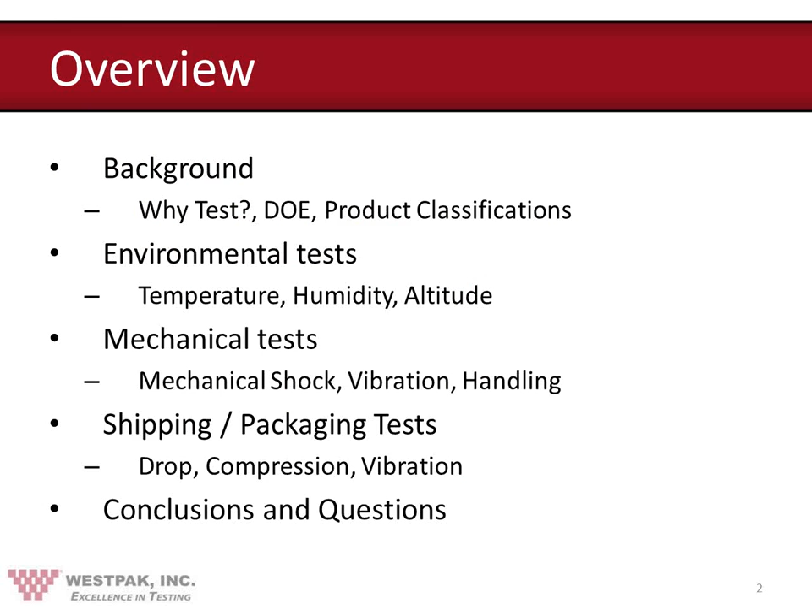So, why test? All products will be subjected to hazards throughout their lives—shipment, storage extremes, different operating environments, rough handling and installation. Many products are also subject to regulatory and certification requirements, often including safety, EMI and EMC compliance, especially for electronic products, and product functionality—basically the product does what it is intended to do and is compliant with any industry standards. Lastly, it's a good idea to test to ensure high levels of customer satisfaction and low warranty claims.

I'd like to add that a question we often hear is, why should we test this product to begin with? It's rugged as a tank. The real answer is the product will in fact be tested—that's not the question. The distribution environment, and sometimes the in-use environment, will see to that. The real question is, who sees the results first, you or your client? For the sake of a quality delivered product, we highly recommend testing the product first so you can determine if changes are necessary prior to the customer getting upset with it.

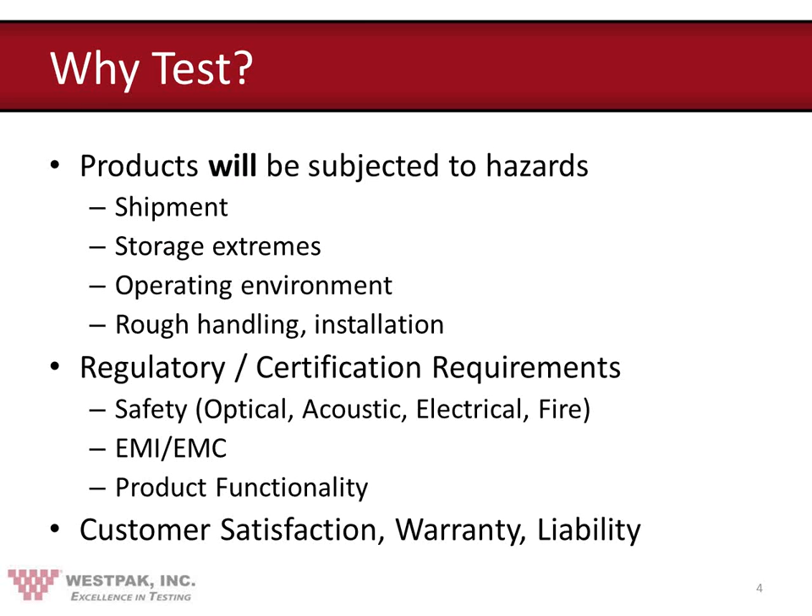Design of experiments, or establishing the test plan: characterize all the environments or hazards the device under test will see throughout its life. For this webinar, we'll split them into 3 sections—environmental hazards, mechanical hazards, and shipment or packaging hazards. Consider if there are any unique or combined environments that your product may see in its life.

Next, determine the acceptance criteria or inspection criteria for your product. It may be acceptable to have some minor cosmetic damage, but it is not acceptable for the product to fail to operate. It's always a good idea to start small—do basic mechanical or temperature testing early in the process to screen out any major issues with the product. Lastly, consider testing to level versus testing to failure. Testing to level are the minimum hazard tests the product must survive to be brought to market. Testing to failure, or HALT testing, is extreme testing in which the product is forced into a failure mode, and based upon that, product improvements can be made.

I'd like to add that another option we often see is margin testing, which does test the product to failure. The reason is a good one from a theoretical standpoint: it tells you how much headspace you have in your design. If you know a given design has to withstand a certain amount of vibration, impact, or other environmental input, you know what your spec level should be. If you're able to double that with the product, you know it has 100% headspace for that particular input. That's very valuable information for cost reduction, ruggedization, eventual package design, and a lot of other things. So there's a case to be made for margin testing rather than just testing to a certain level.

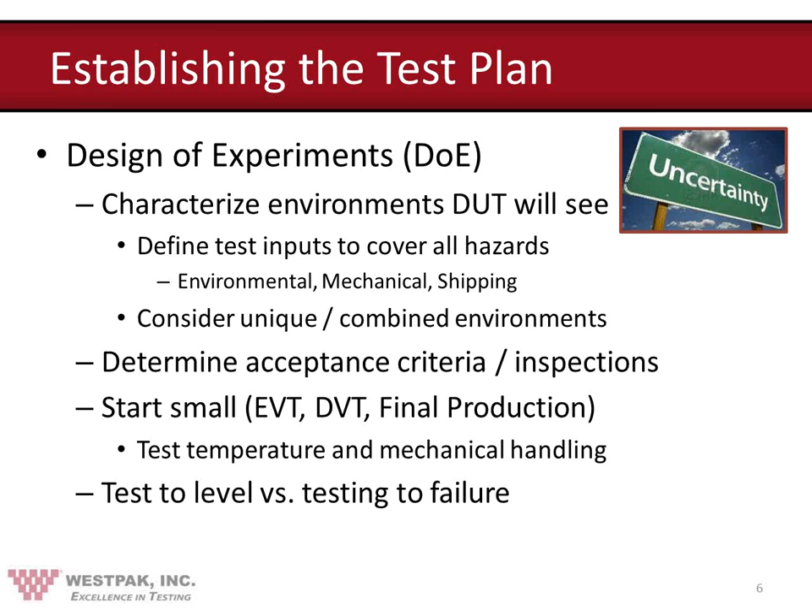Next, not every type of product should be subjected to the same level of test. Today we'll be talking about a 19-inch rack mount network switch, the 24-port basic network switch. For network hardware, they're often split into three categories: small handheld products, often consumer products; a small product that an individual can handle or manipulate themselves; or a large product that takes two or more people to move, using a forklift, etc.

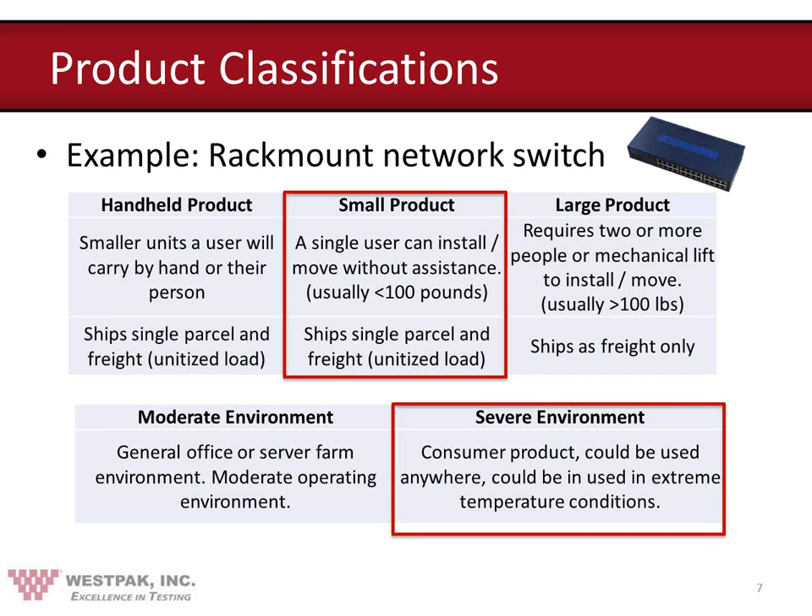The environment can either be moderate or severe. A moderate environment might be a general office or a server farm—you know where it's going to go and what those operating environments look like. A severe environment means it could go anywhere and be used in any conceivable location. Because we don't know where this network switch is going to go, we're going to consider all of our tests today to be severe environment tests.

So, on to testing. First, environmental testing. The first test we have to discuss is non-operational temperature testing, starting with storage testing. Storage temperatures can range between -40°C and +85°C. These are pretty severe temperature changes, but it's not inconceivable that a product will be subjected to that during its life. Shipping conditions are sometimes tested here too—usually a cold condition of -40°C, a tropical condition of 40°C at 90% relative humidity, and a desert condition of usually 60°C with either 15 or 30% relative humidity.

What I've discussed up to this point are static extreme conditions. Often testing is also done in a cyclic manner, going between high and low extreme temperatures at 1 to 2°C per minute, or as a thermal shock test, transitioning temperatures between 10 to 50°C per minute. There's a whole slew of test standards describing this, and the common issues are things you'd expect: different thermal expansion coefficients, oxidation or corrosion from humidity, and exceeding material limits, where you get above the thermal limit for a material and things melt or get soft.

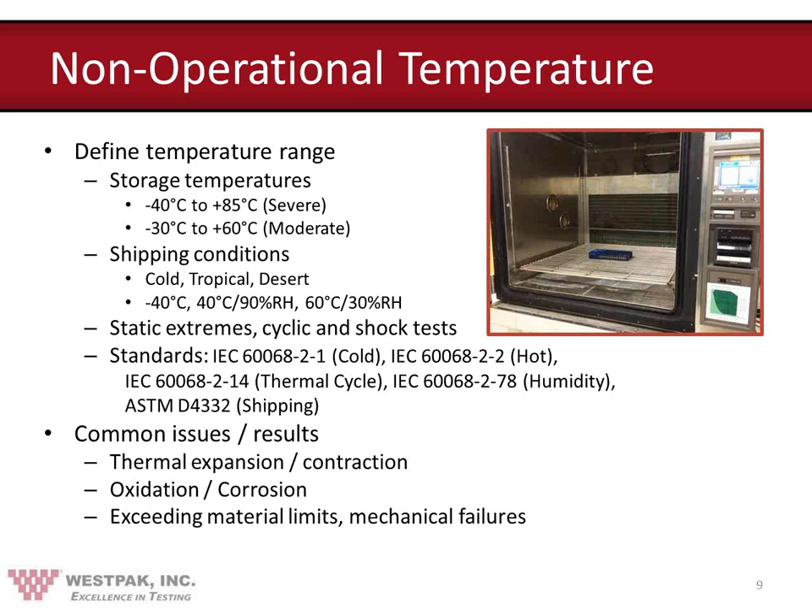For an operational temperature test, you're usually concerned about different components operating above their maximum specification inside the unit. For this test, we've opened up the switch and you can see there's a chip with a heat sink on it. It's been instrumented with thermocouples so we can determine how hot it gets during operation. Sometimes products will have internal temperature sensors that can be used for this instead.

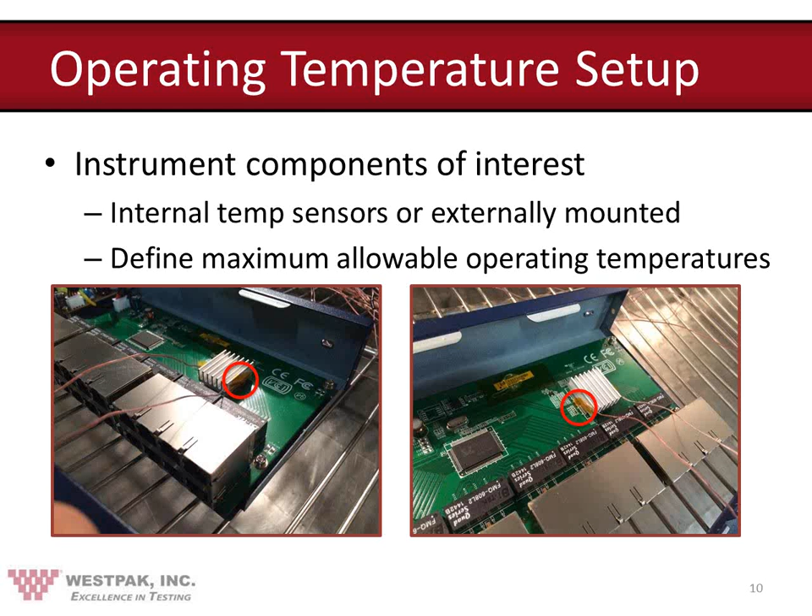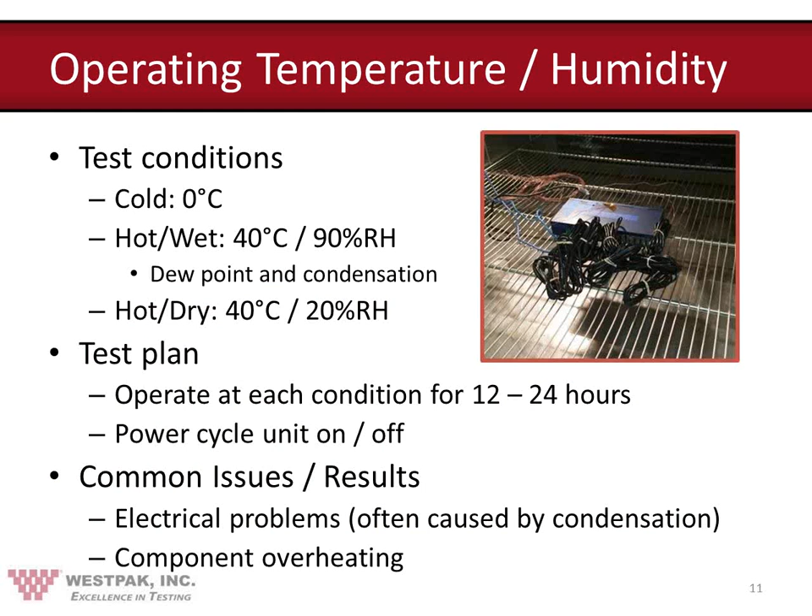A typical operating temperature humidity test will be done at three conditions: a cold condition, a warm and wet condition, and a warm and dry condition. The warm and wet condition can be very severe—if any components inside the unit are cool, they may suffer from condensation buildup. The test plan usually has the unit operating in each condition for somewhere between 12 to 24 hours, and it's also common to power cycle the unit on and off to force condensation issues. Common issues and results, as you'd expect, are electrical problems and components overheating.

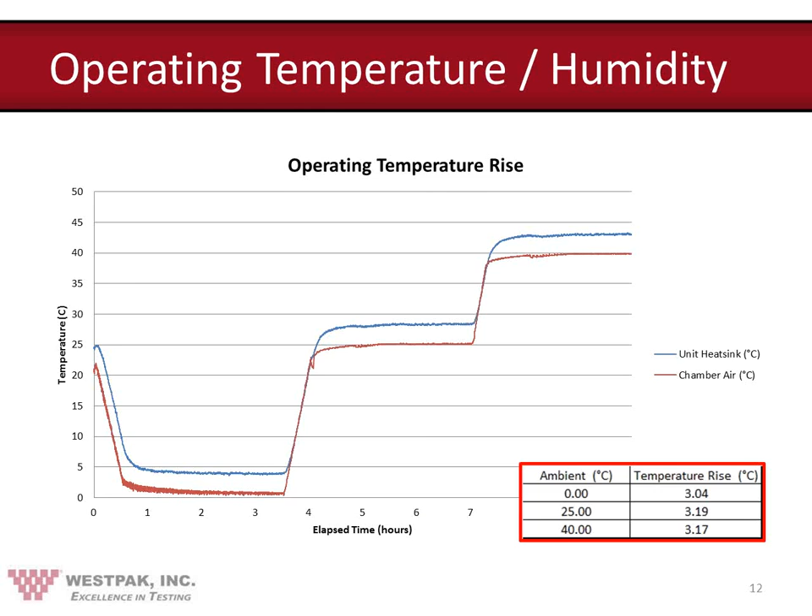I'd like to add that the reason for altitude testing is not necessarily limited to aircraft or shipment, as some might think. All aircraft are pressurized, and the pressurization level generally is controlled, well, it has to be controlled by the pilots. Certainly is controlled by the pilots union, and it's almost always 8,000 feet. An exception is the so-called Dreamliner that Boeing is now flying that is pressurized to a level of 6,000 feet.

But almost always the aircraft are going to be pressurized, and 8,000 feet is about the max you're going to get. On rare occasions, so-called feeder aircraft will get to a little higher level, but pilots are required to have supplemental oxygen and pressurization above 13 to 14,000 feet. So there's not a huge upper level there.

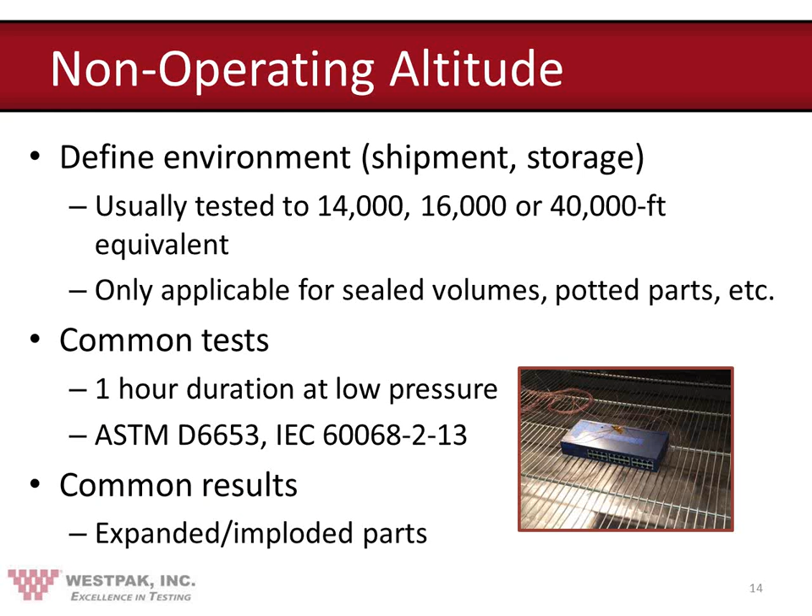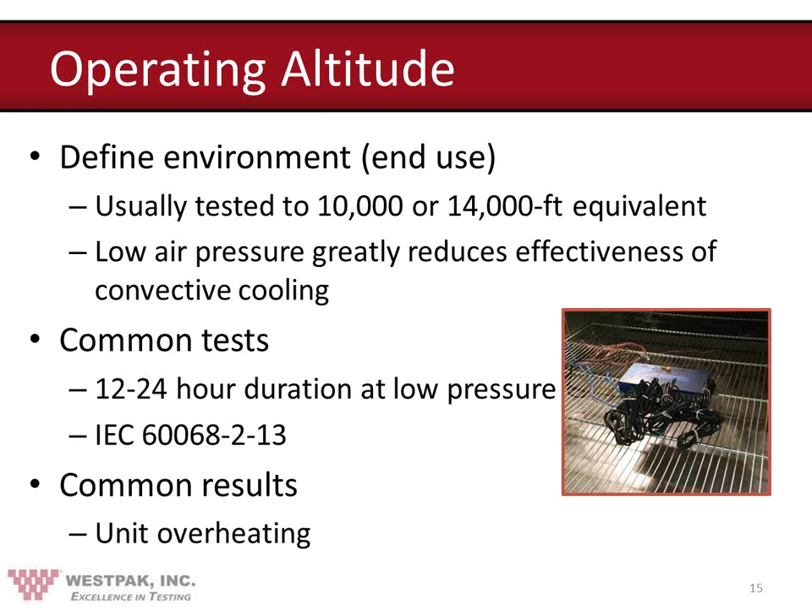Next, we have an operating altitude test. These are usually based upon usage environments. Often this is done at 10,000 feet or occasionally at a 14,000 feet equivalent. The low air pressure greatly reduces the effectiveness of the convective cooling of the product. The common tests are usually longer, between 12 to 24 hours in duration at low pressure. They're usually done at an elevated temperature also of 40 degrees C. The common result we see is the unit overheating during test.

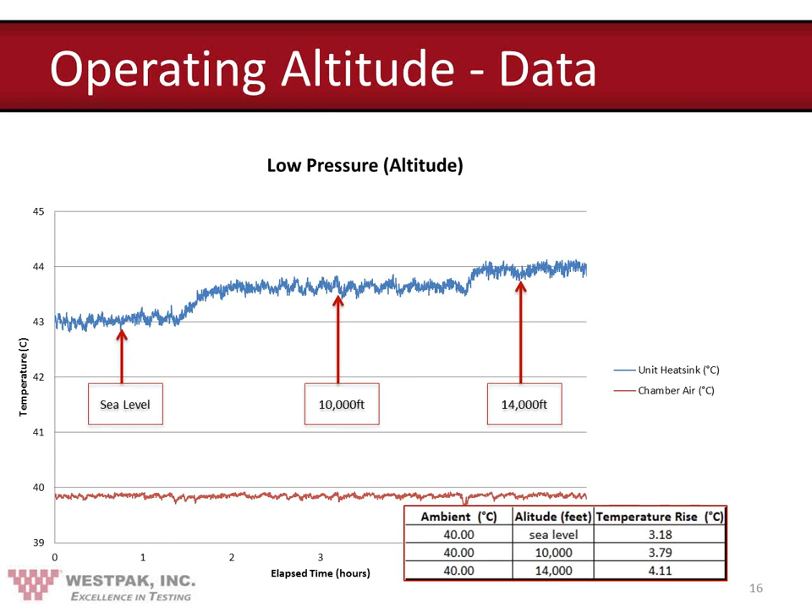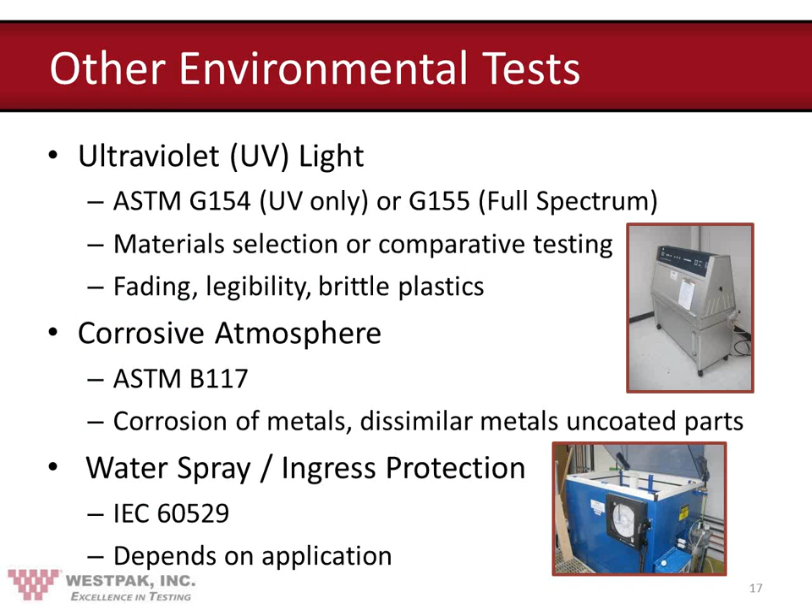Some final thoughts on environmental testing. Think about typical inputs versus worst case scenarios. While the unit is operating, consider high or low voltage inputs. Always think about safety. Do the thermal cutouts protect the product? And if the device does enter some sort of failure mode, is there a hazard, either electrical or mechanical, to a user?

And as I mentioned in the beginning of the presentation, think about your failure criteria. Is cosmetic damage okay? If so, to what level? Does the product need to continue to function in harsh environment, or is it okay for it to shut down? And lastly, again, is it still safe?

I'd like to add that in our experience, damage criteria, or the definition of what constitutes failure, is one of the biggest sore points, if you will, or sticking points in the whole test. So you have to be able to understand what constitutes failure or damage to your product. Some people will actually make classifications out of damage in terms of moderate, normal, or severe, things like that.

Sometimes damage can be considered cosmetic, sometimes it's non-functionality. We often encourage clients to consider damage as any condition in which you would not want your customer to receive the product. However you define it, it's very important that you understand this must be defined prior to actual testing.

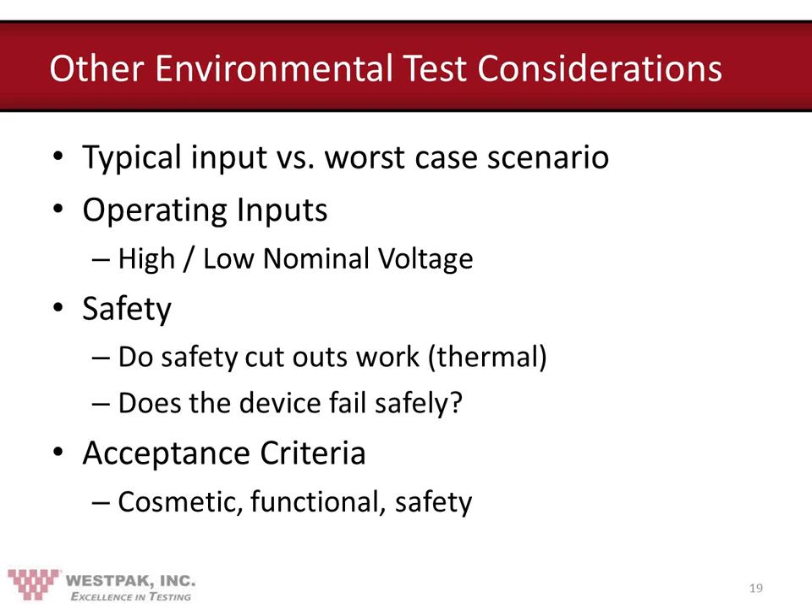That wraps up environmental testing.

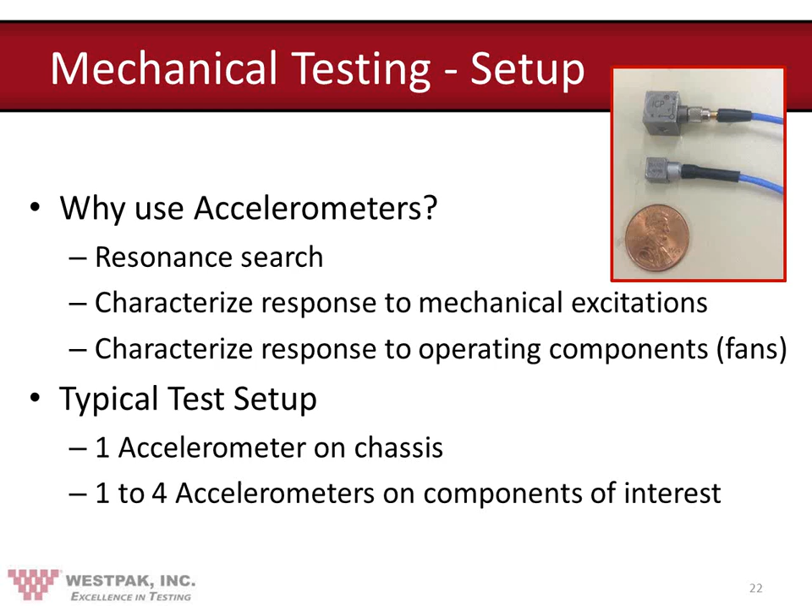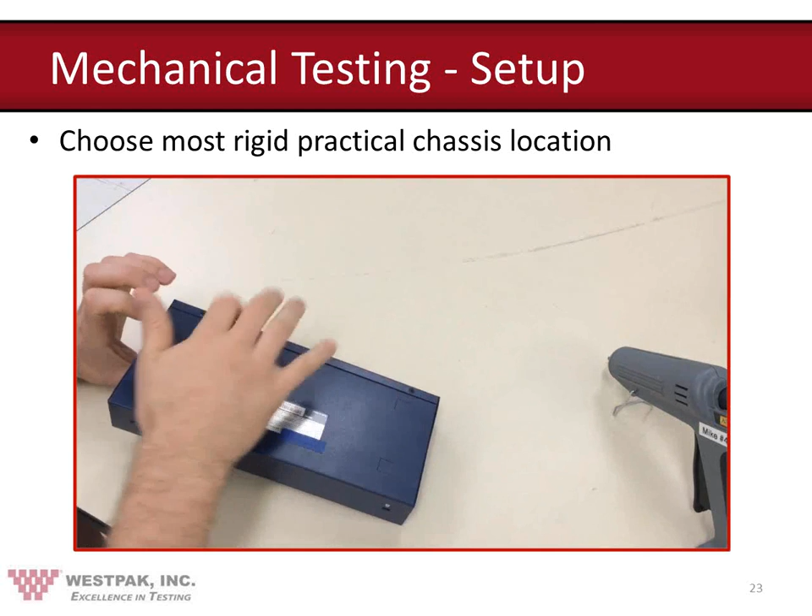So first we need to determine where to mount our chassis accelerometer. One way to do this is to tap the exterior of the unit to hear the highest pitched or most rigid location on it. Usually you can identify it visually as well, looking for places where there are several screws. You can see I've now determined where to put the accelerometer near the AC power inlet.

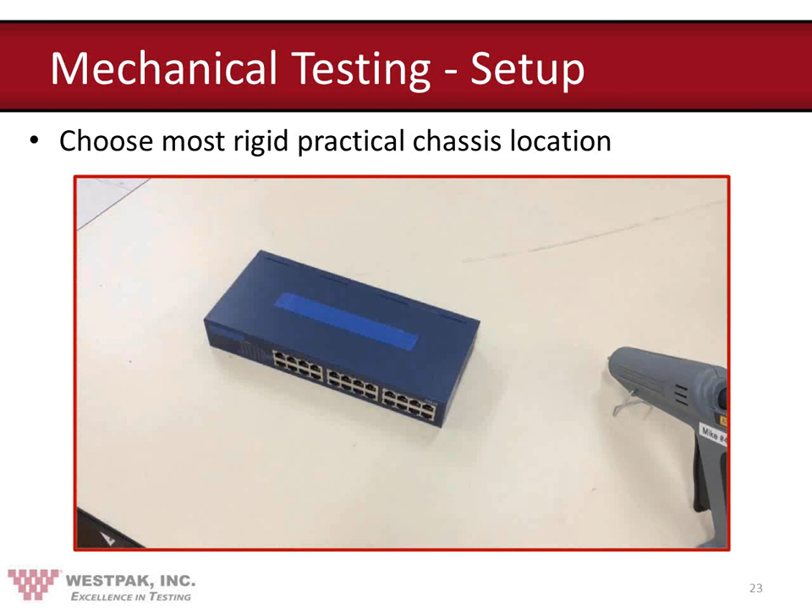Next we'll mount the accelerometer. Squirt a little bit of glue onto the area where the accelerometer is to be adhered, press it on, and wait 15 to 30 seconds for the glue to dry.

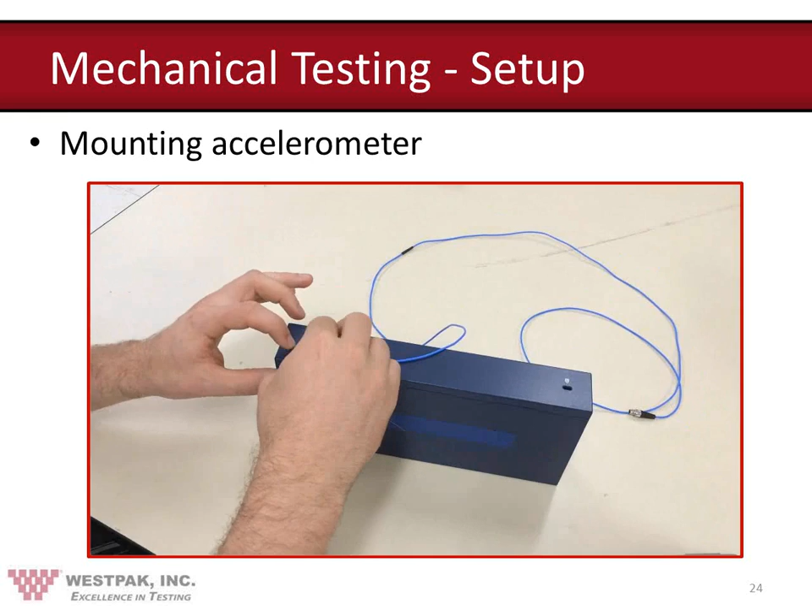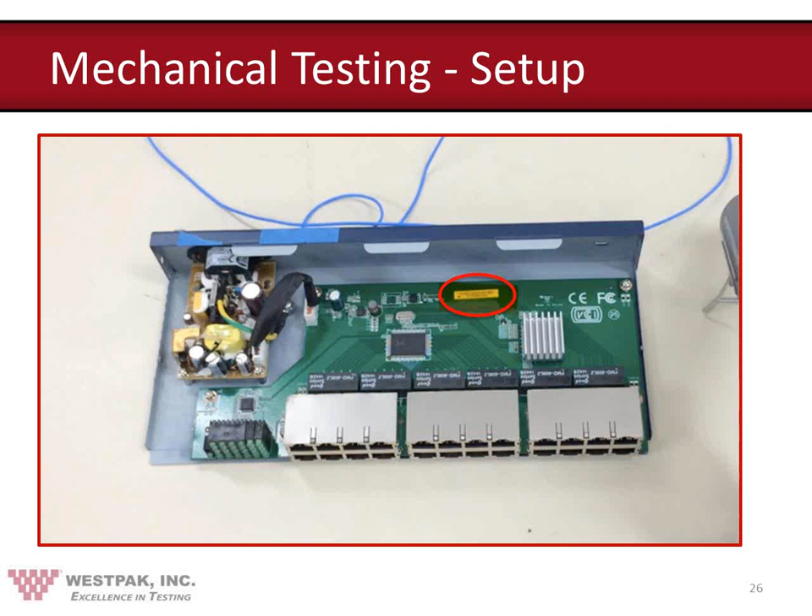It's not practical to mount there due to the traces being close to the surface, so I'm going to mount the accelerometer just above the center of the backplane. You can see it circled in red. I put a piece of Kapton tape down to help prevent any damage to the PC board. Here's a picture with the accelerometer mounted to the unit, just hot melt glued onto the tape.

The whole area of mounting a transducer to a test specimen is one that's evolved over the years. Many of you may be aware that many transducers come with beeswax attached to them, so in times past that mounting technique has been considered acceptable. Some people insist on using super glues or some fast-acting epoxy glues or things like that. Some insist on mechanical mounts, such as the military.

We make wide use of hot melt adhesive because of its wide acceptability for various types of accelerometers and mounting conditions. However you do your mounting of accelerometers, make sure you convince yourself that you're not severely altering the signal, that you get the kind of bandwidth through that mounting technique that you're looking for, and that you're satisfied with the ability of the transducer to hold in place and give you the data you're looking for. Again, a wide variety exists, you simply have to be comfortable with the technique you're using.

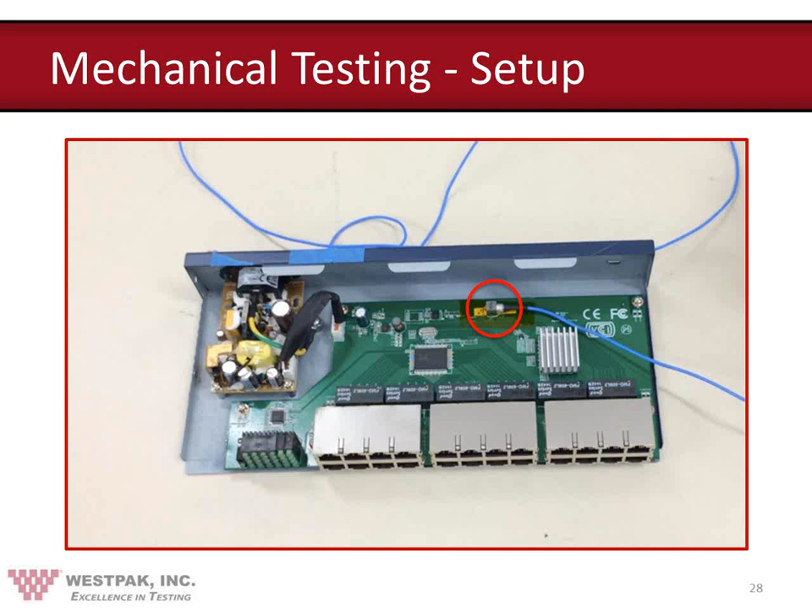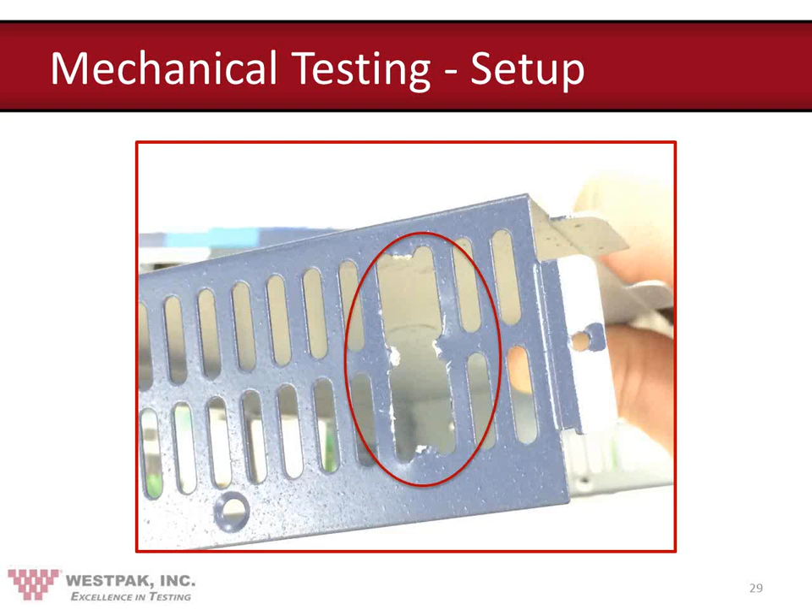Z is usually vertical up-down, X is left to right, and Y is front to back. The numbers are the faces, and this will correlate with the package testing we'll conduct later. The top is 1, the right is 2, the bottom is 3, the left is 4, the front is 5, and the back is 6.

By clearly labeling a product and taking lots of pictures during testing, you always have a much better idea and record of what you did for your test report.

We'd like to remind everybody that it's important to identify the orientation of the product before you actually put the transducers on. After you have it all assembled, you want to be able to make sure that the signal you're getting is from the axis that you intend. So with your X, Y, and Z axes and plus and minus direction all identified, make sure that your accelerometers are applied the same way.

This is especially true if you happen to be using a triaxial accelerometer, one that measures 3 axes at the same time. One reason for this is to save time and money. You don't want to spend your time opening up the unit and reorienting the accelerometer two or three times to get it right. So remember to orient the product and the transducers before you close it up.

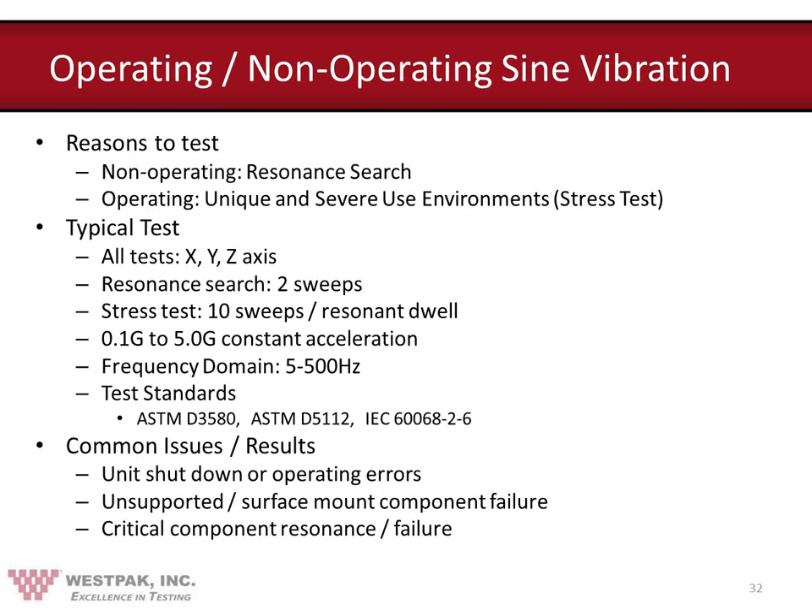Common issues: during an operational test, it's not uncommon to see things intermittently shut down or have operating errors, especially when they go into mechanical resonance. For the general stress test, sometimes unsupported components or surface mount components will come off, or other general mechanical failures can occur. Here's a sine vibration control plot.

This was a half G constant acceleration sweep from 5 to 500 Hz. The profile and control lines are right on top of each other. The table effectively ran perfectly.

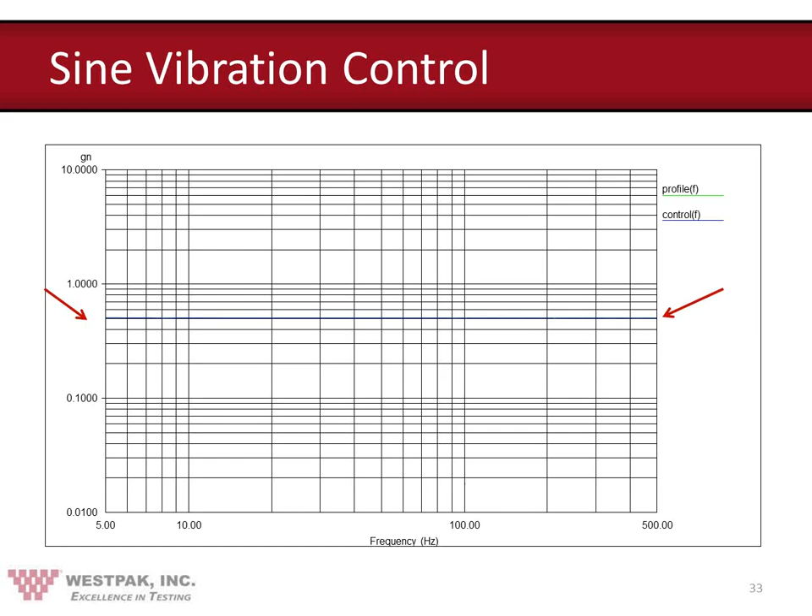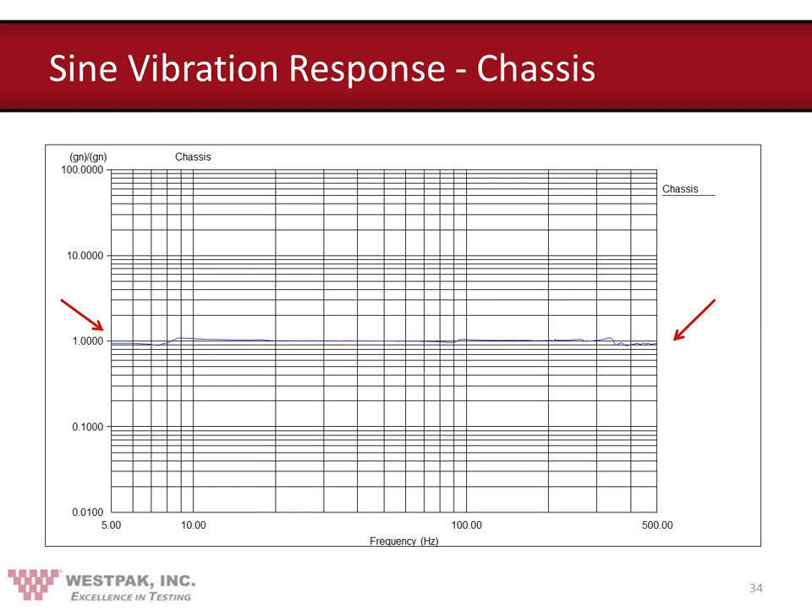I'd like to add a comment here about sine vibration in general. It's an excellent diagnostic tool. It's been around for a long time, probably the oldest vibration diagnostic tool we have. But it occurs in one place in the world only, and that's in the laboratory. It is not a real-world test at all. So all we're trying to do here is really excite the product, and we excite it sinusoidally.

One of the reasons we do that is to find out the exact natural or resonant frequencies of the components inside the product. But you have to understand that when you're exciting a product at a single frequency at a time, which is what's happening here, there's no such thing as destructive interference in the amplitude measurement. Therefore the amplitude levels you get in sinusoidal vibration, that deviation in the vertical axis, is artificial.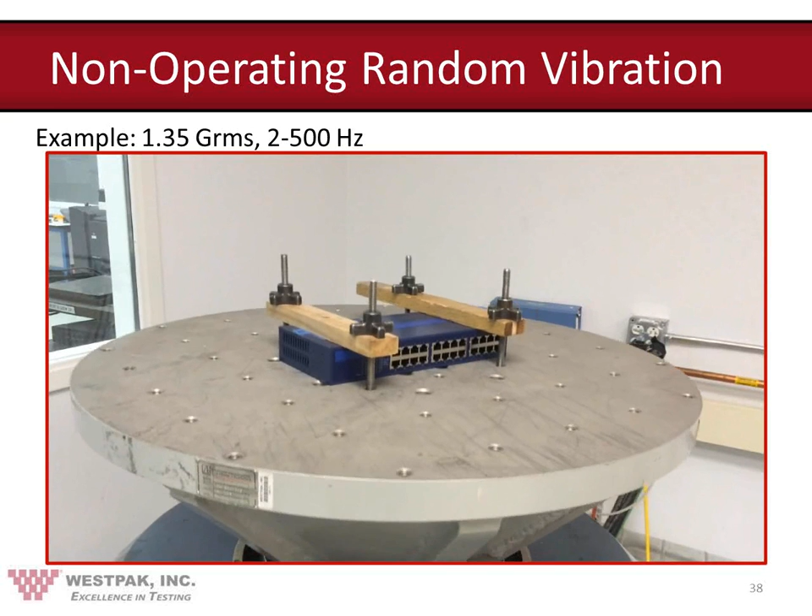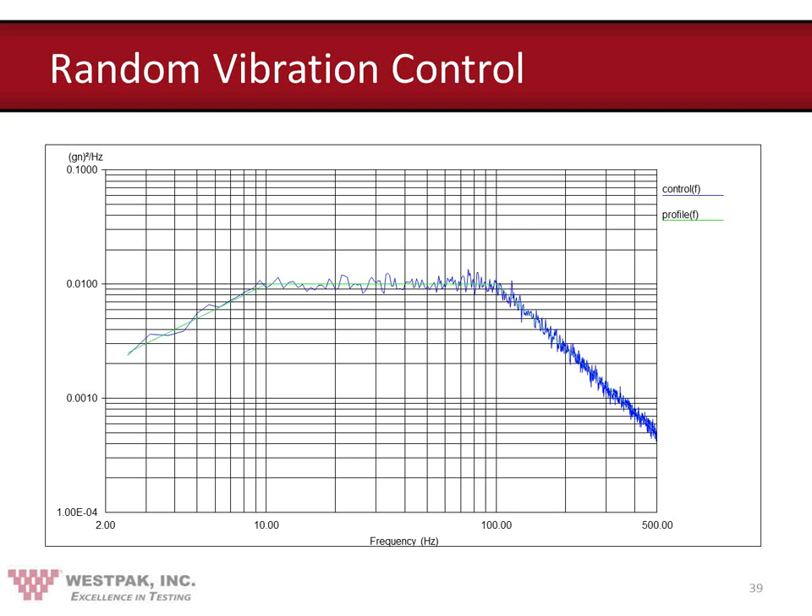Here's the PSD, or Power Spectral Density Control plot for the vibration test. You can see this one goes from 2 Hertz to 500 Hertz and is shaped to have a maximum vibration input between 10 to 100 Hertz.

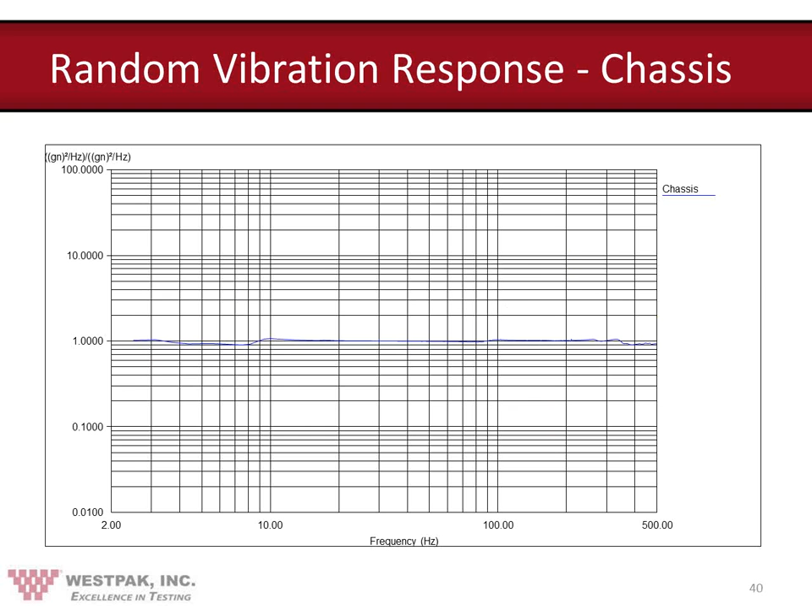Like the sine test, we've captured the response data. You can see the chassis, as with sine, basically has no response in this frequency domain. The PCB, however, does have a significant resonant response. Like the sine test, the resonant response frequencies were 170 and 216 Hertz, with amplification levels of up to 20 times the input. If tested for a long period of time, it's possible that this test could cause mechanical issues.

It's important to note that this data is real live data, and it shows what actually happens from both a theoretical and an actual standpoint. Namely, that this spring mass system, or actually multiple spring mass systems that we're measuring, respond the same to sinusoidal and random vibration. And that's key. All spring mass systems will respond at their natural frequency regardless of the excitation, simply because they can't do anything else. That's an important concept to remember.

That's one of the reasons why both sinusoidal and random vibration are still used, because they both give you approximately the same results. It should also be noted that to do a sine test, you have to sweep through the entire frequency band of interest, one frequency at a time, depending on the sweep rate, so it can take a while. Random vibration excites all frequencies and all amplitudes simultaneously, so it can be a shorter test if all you're looking for is the natural resonant frequencies. If you're looking to do a fatigue test, sinusoidal may be a better test because then you can dwell at the natural frequency and get some good severe input. So various tests can be done - it all depends on what you're looking for.

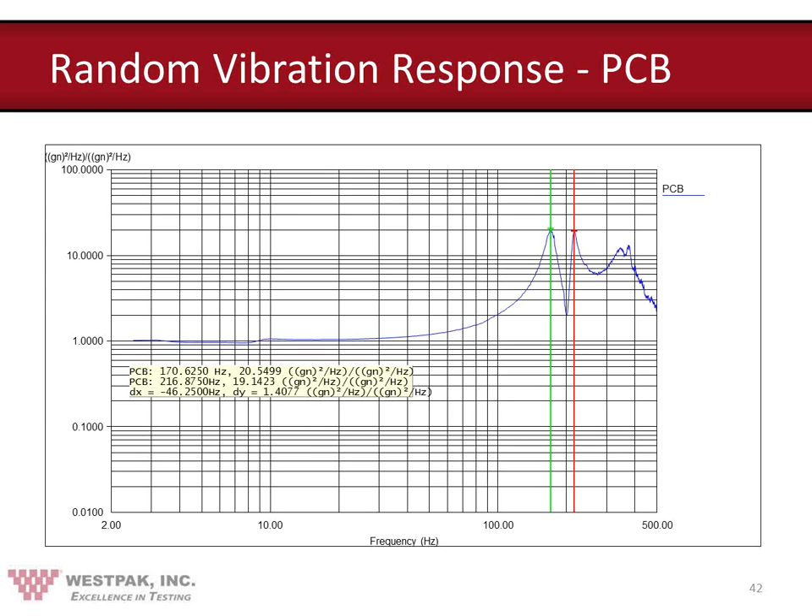Our last mechanical test is operational mechanical shock. A typical test will be a half-sine pulse with a duration between half to 18 milliseconds. Shorter duration pulses simulate bare product events, like a product being dropped a few inches onto a table. Longer duration shocks simulate what a product may see during shipping. Peak G levels depend on the product, typically between 6 to 50 Gs. Units will usually be tested in all 6 orientations, X, Y, and Z in both directions. Results are usually mechanical in nature.

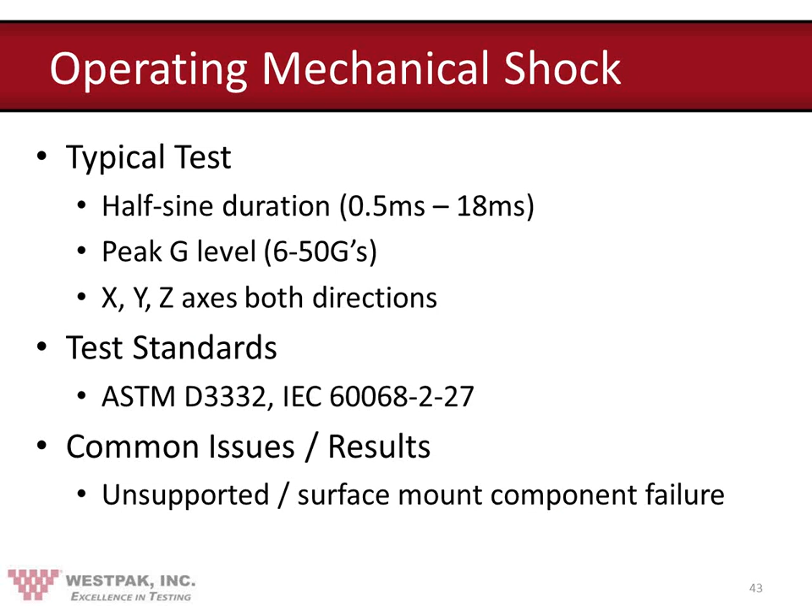Here we have a non-operational mechanical shock test. Typical test is very similar to an operational test, just conducted to a higher level of severity. Sometimes a trapezoidal pulse shape is used, which Herb will talk about in a second. It should be noted during shock testing, especially in non-operating mode, that the product will respond differently to the shape of the waveform it sees. That waveform can be shaped by a number of things, typically the cushion it's in if it's in a packaged environment, or the surface it's dropped onto if that happens to be the source of the shock. That's one of the reasons why a trapezoidal waveform is highly recommended for this.

The response spectrum of a product, any spring mass system, to a trapezoidal pulse is the most severe of any waveform possible—more severe than a half sine, more severe than a sawtooth pulse, or any other waveform. So it's highly recommended to use the trapezoidal wave for this.

It's not very common because a lot of people are hung up on using a half sine. They're easier to program, they think. Although trapezoidal pulses are incredibly easy to program—if you have a constant pressure cylinder, all you have to do is add nitrogen gas or change the drop height to change the pulse. It's easy to do, it's just not often done.

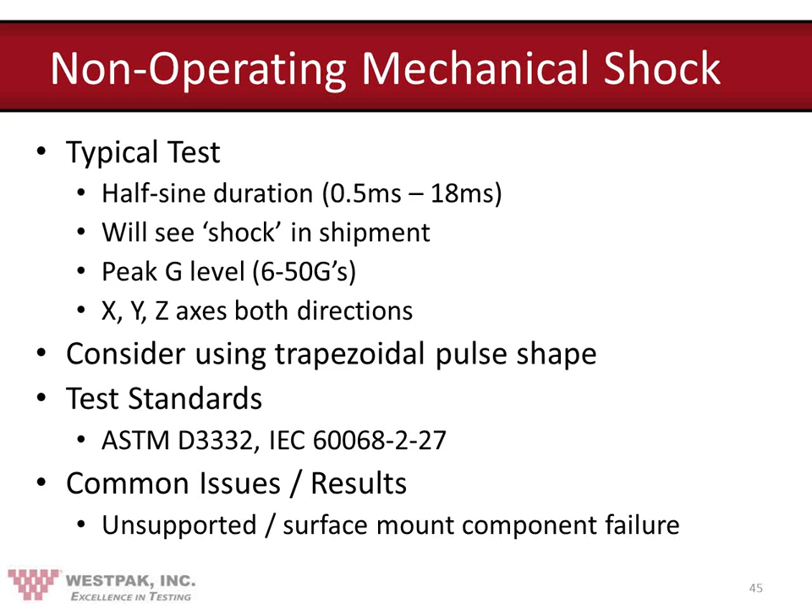Here we have a video of a shock test being run on an electric shaker. This is a 40G, 11 millisecond half sine shock pulse. Here we go—one big shock in the middle. Let me play it one more time for you. Right there.

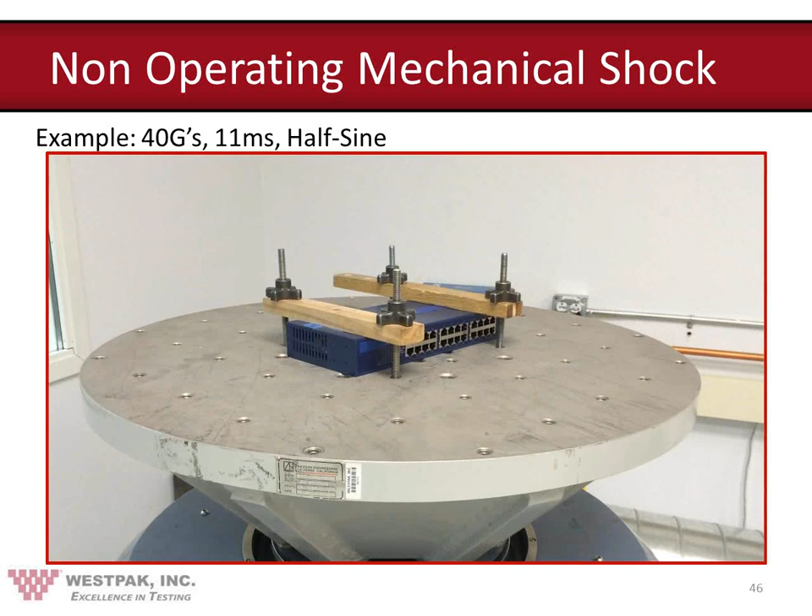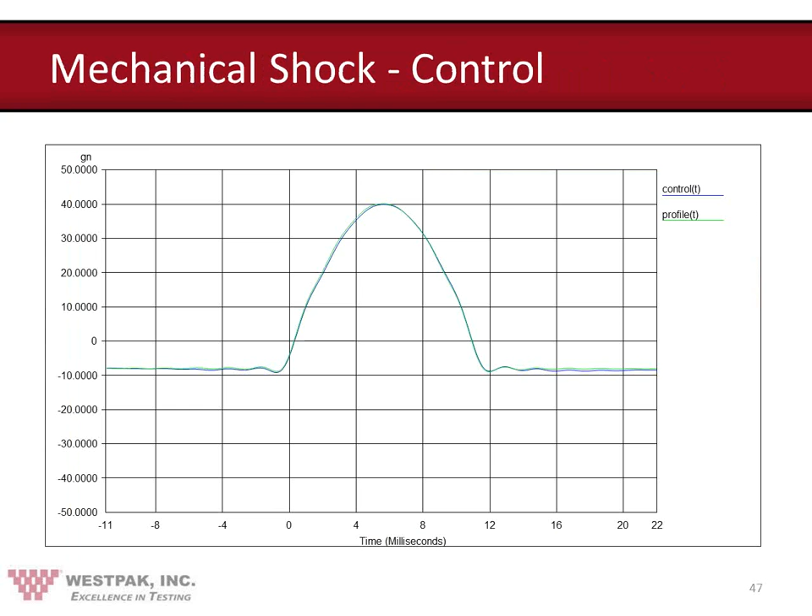Here's the data from the shock test. You can see the green profile, the ideal waveform, and over it a blue line which represents what was actually done. The table controlled this one very well. The chassis reacted just the same way the table did—it was rigidly coupled.

Here's the data from the PCB board. You can see that it didn't respond like the chassis or table input. Basically, at the center of the board where we measured it, it did not have a significant mechanical response to the test input.

Mike has shown you a typical half-sine shock pulse with a duration of 11 milliseconds and a peak acceleration of 40 Gs. The 11 millisecond duration is very common. You find it in a lot of different environmental test specifications, but it's not very significant. It has its origin back in the 60s with shock testing that was originally done on what was referred to as the Barry sand dropper.

It just happened to be a noisy machine that dropped a shock table into a bed of sand, and 11 milliseconds was about the best people could make out of it. So it kind of became a standard, and it took on a life of its own, and you see it around everywhere. But it's important to recognize that there's no particular significance to the 11 millisecond duration. It just happens to be a good medium kind of waveform, if you will.

So don't get too concerned about adding or not adding an 11 millisecond shock pulse to your environmental test standard. Remember that it came about because of kind of a grandfathered thing way in the past, and it's just kind of moved forward in time. Again, nothing special about it.

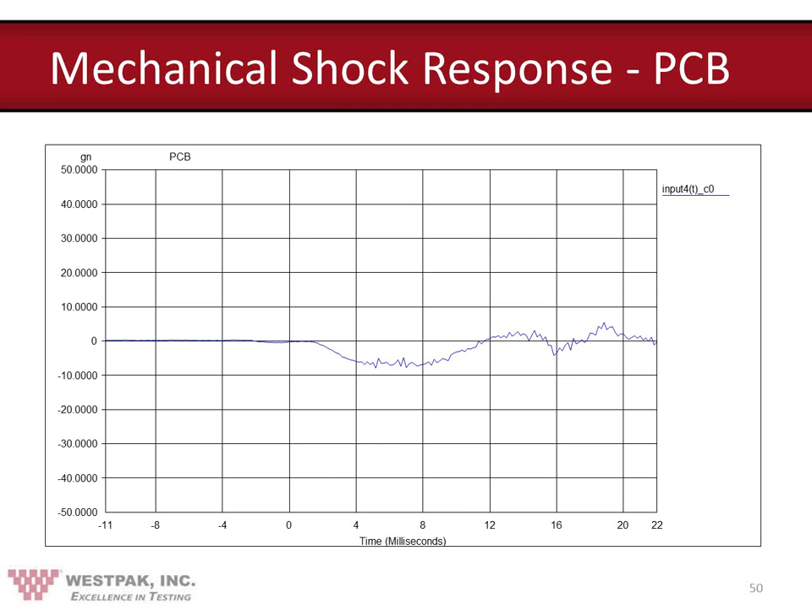Our last mechanical test is mechanical cycling, basically evaluating all the components that might move inside the unit. For our network switch, that means the AC cord plug on the back and all the LAN connections on the front. For a product like this that'll likely be installed and left to sit, 100 cycles might be a good number to use. If you can, try to define the cycle force, speed, and duration.

Units like this could be tested by hand or by machine. With 100 cycles for one unit, it's likely to be way more economical to do it by hand. Test standards are difficult for these—usually they're specified by the company conducting the testing. Common issues are exactly what you would expect: quick wear out, things breaking, or changes in actuation or insertion and removal force. This wraps up all the mechanical testing.

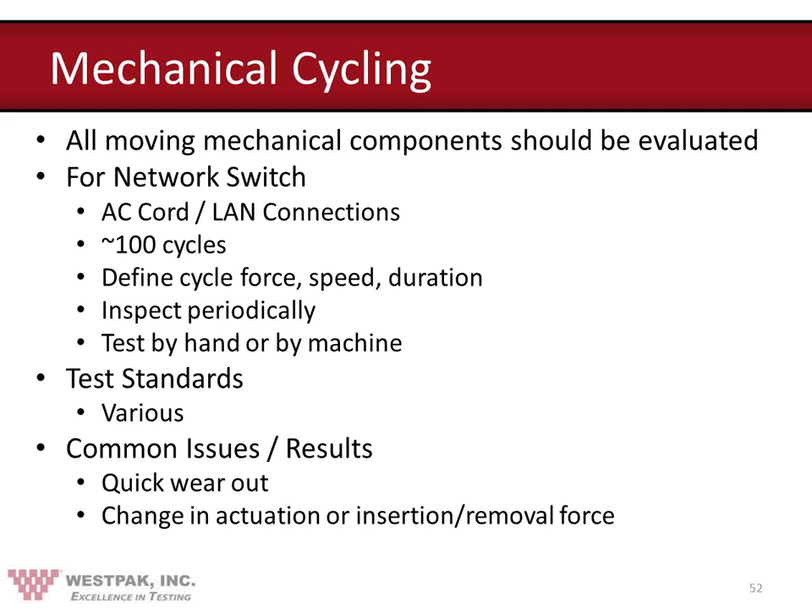We got some questions here. The first one is, should both sine and random vibration tests be performed during qualification reliability testing every time? What is the advantage, if any, of one over the other? Which one of you guys wants to take that one?

I'll start. The short answer is yes, it's a good idea if you have the time and resource to conduct both tests, because they're going to tell you slightly different things. The sine test very cleanly shows you all the resonant points of the product, the inside parts of the product, but the random vibration test is going to be generally more representative to what you would see in the field, both in shipment and in operation. So if you can, try and do both.

Let me jump in here and add that a good way to answer that question is to say, what the heck is the difference between the two? In sinusoidal vibration, you're essentially exciting a spring mass system or multiple spring mass systems at one frequency at a time. So that's one input, one response, or maybe multiple responses, but one input, that's the critical thing.

So what happens when you put in a single input? Well, the thing is going to respond in a singular way. So if there are harmonics, you're not going to excite those. If there are subharmonics, you're not going to excite those. If there are constructive and or destructive interferences between waveforms in the systems, you're not going to excite those. But you will excite that one frequency at a time. So you're going to be able to see exactly what the response of the unit is to that one frequency only.

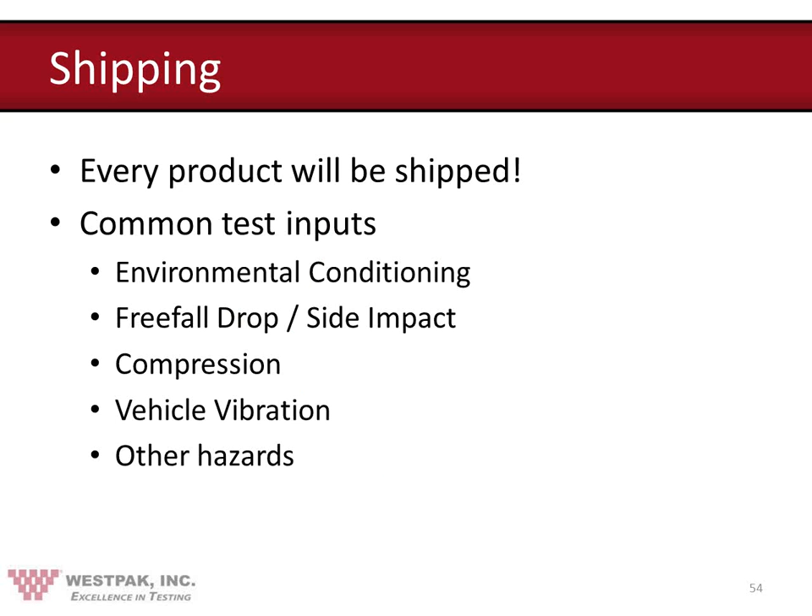Back to you guys. All right, for the third half of our webinar, we'll talk about shipment or packaging testing. Every product will be shipped. Common test inputs include environmental conditioning, chamber testing, product freefall drop or side impact testing, compression, vehicle vibration, and other hazards. Common standards are either from ISTA or ASTM. The most common one for small parcel with a pretty quick and easy test plan is the ISTA 2A standard.

These test standards for packaging have evolved over the years. The ISTA 2A used to be for international shipment, and they refer to this as a general simulation, meaning it's not designed to duplicate any particular type of environment, but what would generally happen when you ship the product. These package integrity tests are designed to bring the hazards of the distribution environment into the laboratory, subject the product package system to these hazards, and then evaluate the results, most of the time by visual evaluation, sometimes by actual monitoring. The general term for these are package integrity tests.

ISTA, the International Safe Transit Association, is a big producer of these kinds of procedures. ASTM, American Society for Testing and Materials, is another one with their D4169 and 7386 procedures, among a number of other procedures. All these are designed to basically determine in the laboratory whether or not successful shipment of this product is likely.

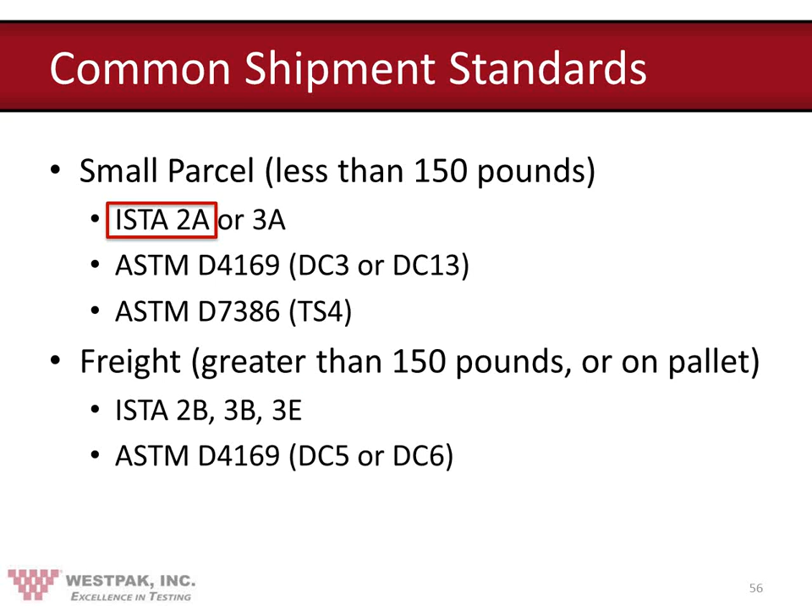For this, earlier we talked about product orientations. You can see I've transferred the product orientations to the package. This way you know how the product is sitting inside the package during all the packaging testing.

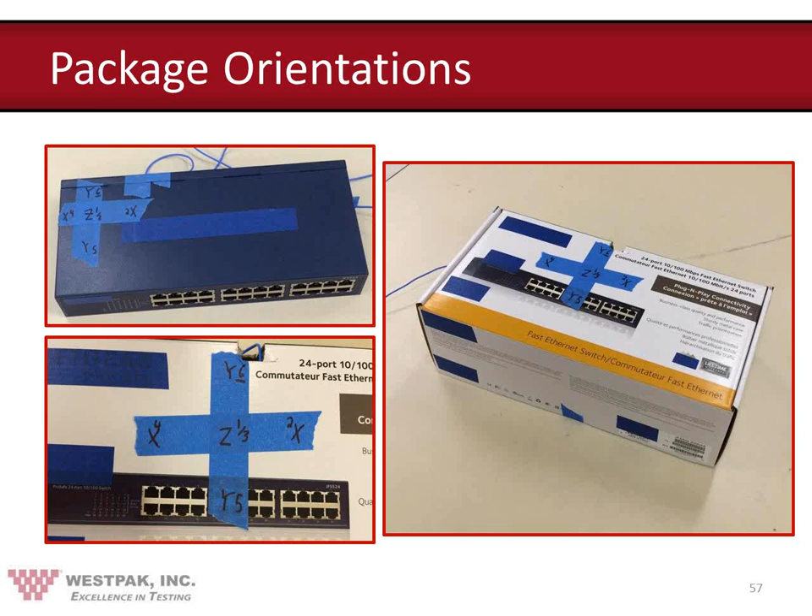The environmental conditioning is meant to simulate the different extreme environments the unit may see during shipping. This subjects both the unit and its package system to the harsh environments. Usually this causes issues with the packaging, the corrugated fiberboard or cardboard getting damaged by the moisture content in the air. Sometimes there's condensation on the EUT, sometimes tape or closures come open. It's important to note that the environmental conditioning is conducted on these materials and package systems prior to the mechanical test because they will absorb moisture, and it's possible to have a product package system pass a test with a dry container and fail the same test with a moisture-laden one from high humidity conditions. So make sure you determine your conditions correctly and conduct the test procedures in the sequence indicated, which is almost always environmental conditioning prior to the mechanical test.

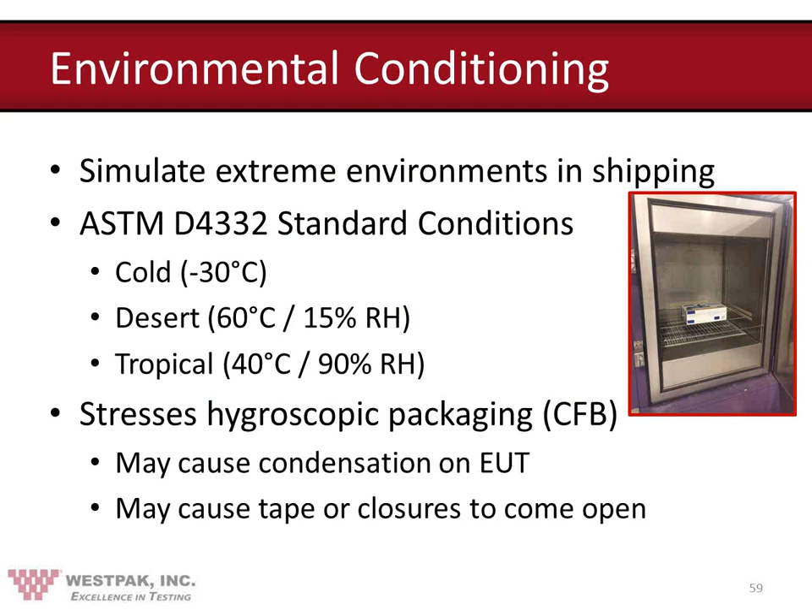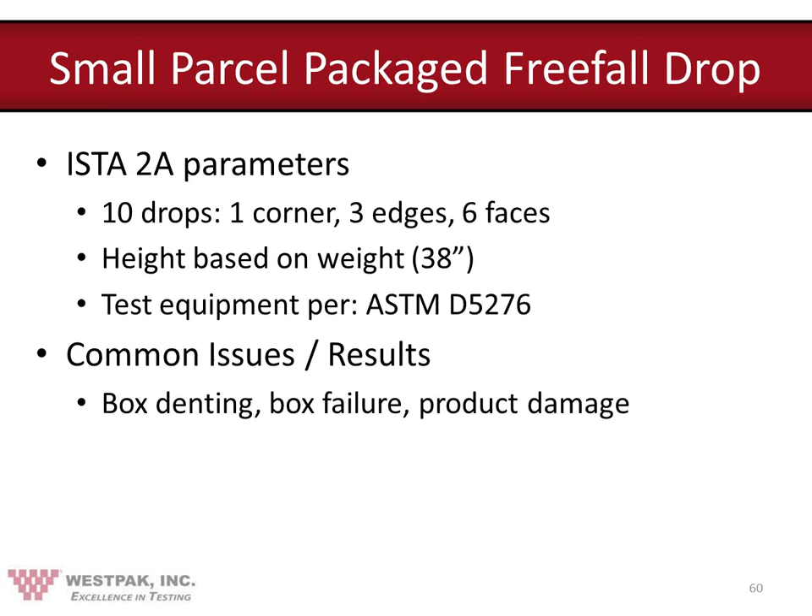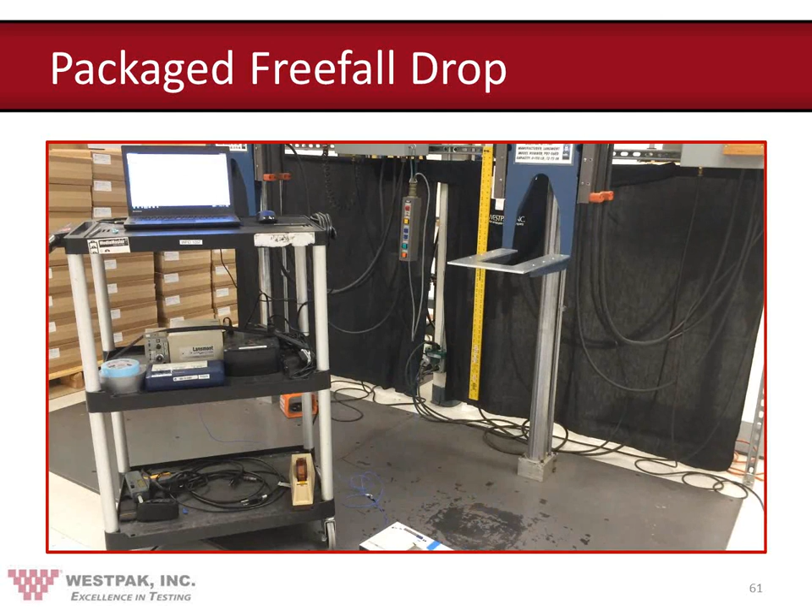So for this, the box is not designed for transport packaging on its own. It would probably be shipped in a case, or it would be overpacked if it were to be shipped by itself.

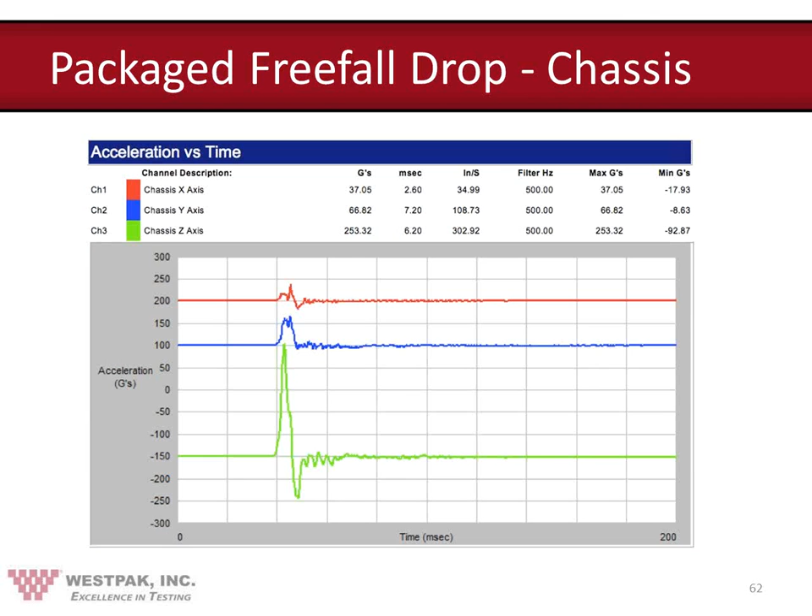The chassis in the Z-axis, the direction we dropped it, saw a peak G response of 250 Gs. Typically for these types of products, you may not want to allow a peak G of greater than 50 or 100 Gs. This all closes the loop on this webinar in that if you know what the fragility of the product is based upon your earlier testing, you know if the results of this testing are acceptable or not.

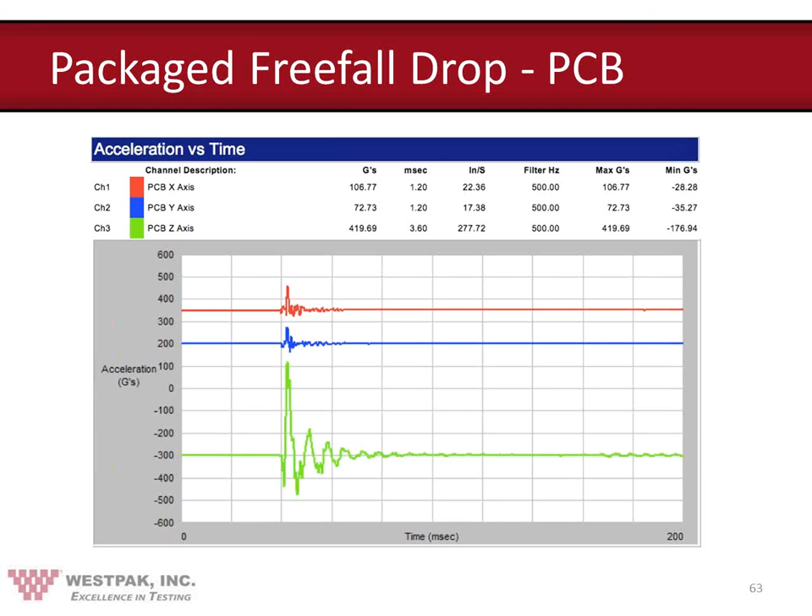The PCB is a similar story, but even worse. It saw a peak G of 420 Gs. That's very severe. So if this were your shipment packaging, it probably should be redesigned to better protect the product.

Next is package compression. This is used to simulate a top load the package might see on a truck or on an aircraft. The basic concept of this is to think about how much free space there is vertically above the unit, figure out what the mixed density of the cargo might be above that, usually 10 to 12 pounds per cubic foot, and to try subjecting the box to that load.

The formula here is the weight of this unit, which is 3.7 pounds, times how many there might be in a stack on a 90-inch stack, minus the one on the bottom, a safety factor of 4, and they also have another factor of 1.4 to account for the apply and release nature of the test. Anyway, for this box and this test standard, it needs to withstand a top load of 415 pounds, which it did. Common issues and results would be the box failure or the internal components being damaged as they're supporting the load instead of the box.

Many of our clients question the suitability or even feasibility of conducting a compression test on the product package system. But remember that what are you really buying with a package? Well, you're buying the protection from the environment, and you are buying the ability to stack this up. And even though you may not stack it up in your facility, I guarantee you that when you ship it, it's going to get stacked, unless it goes all the way to the roof.

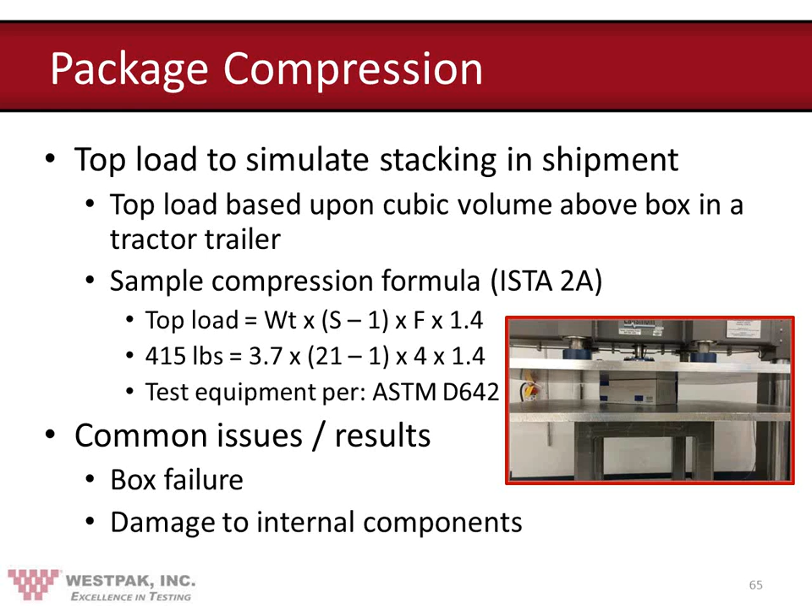Cube utilization and shipping equals good logistics, and that's exactly what the distribution folks want. So your product will be stacked, it will be compressed, and it's a good thing to test for that ahead of time. It's a relatively easy thing to correct. If you happen to have a low compression value, you can add strength by a different design of corrugated box, for example. So you have a lot of flexibility here, but without the data, you just don't know if you have a problem. Mike, back to you.

The last major mechanical test for packaging is vehicle vibration. This simulates truck or aircraft shipment. The ISTA-2A test requires 30 minutes on the base of the unit, 10 on the top, side, and end. That whole sequence is conducted twice. Common issues and results are problems with the unit, and then also problems with scuffing on the exterior of the packaging.

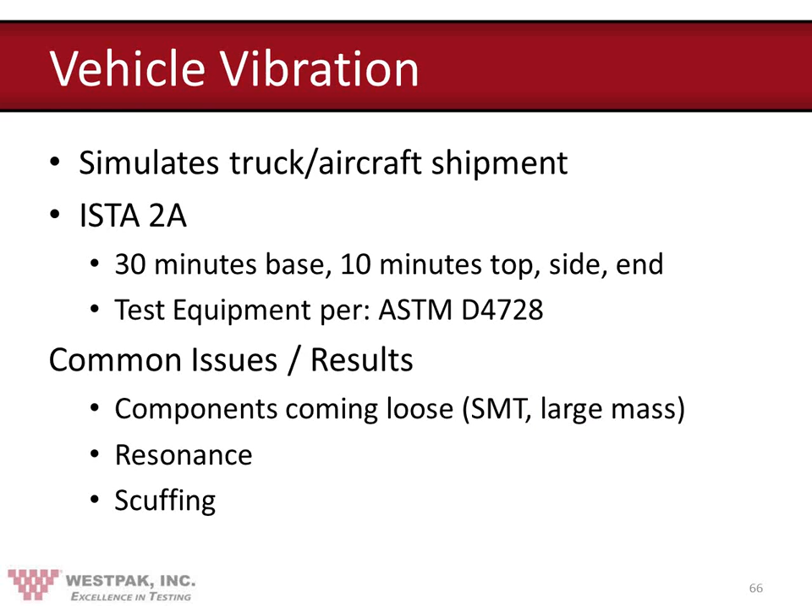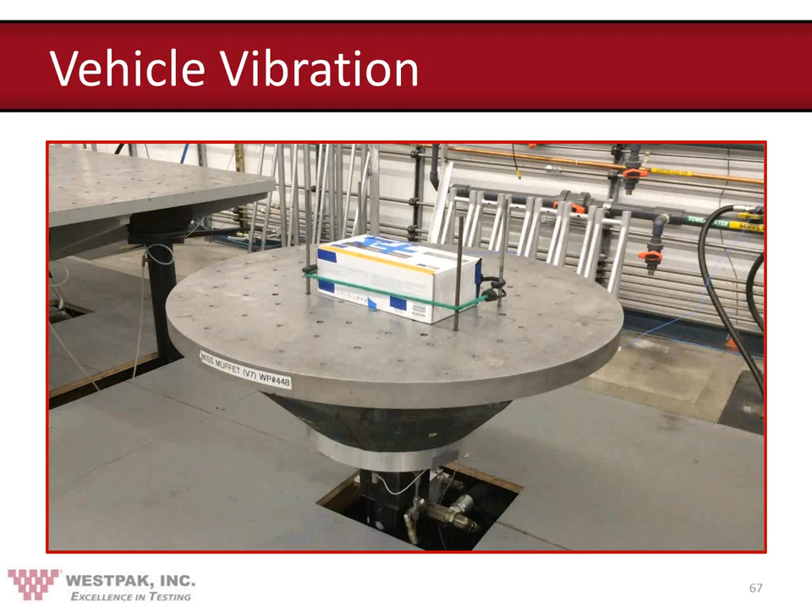Here's a video of vehicle vibration running. The best way to think about this is a truck going down the road, but all the smooth parts of the road are removed from the profile. You just have the major mechanical events.

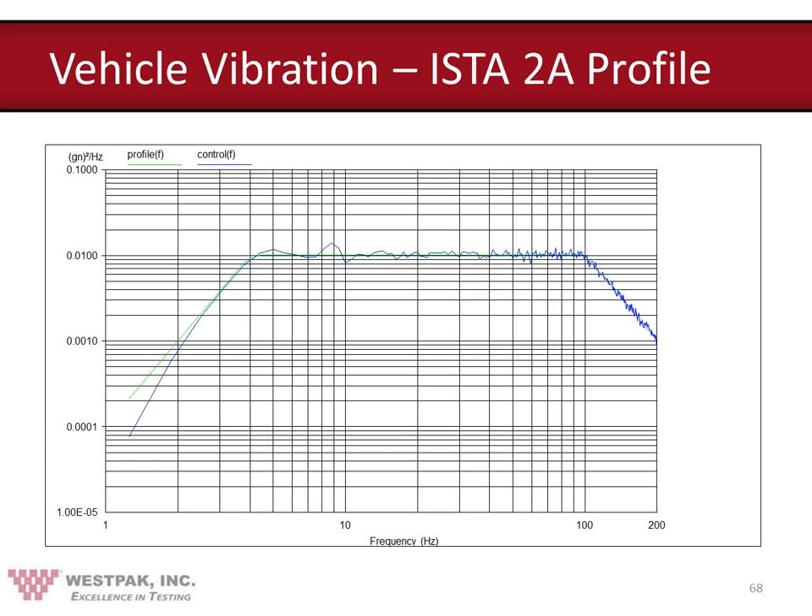The data looks like this. This is the control profile. You can see the frequency domain on the x-axis and intensity on the y. The shaped profile is based upon an aggregate of collected field data for truck and aircraft shipment.

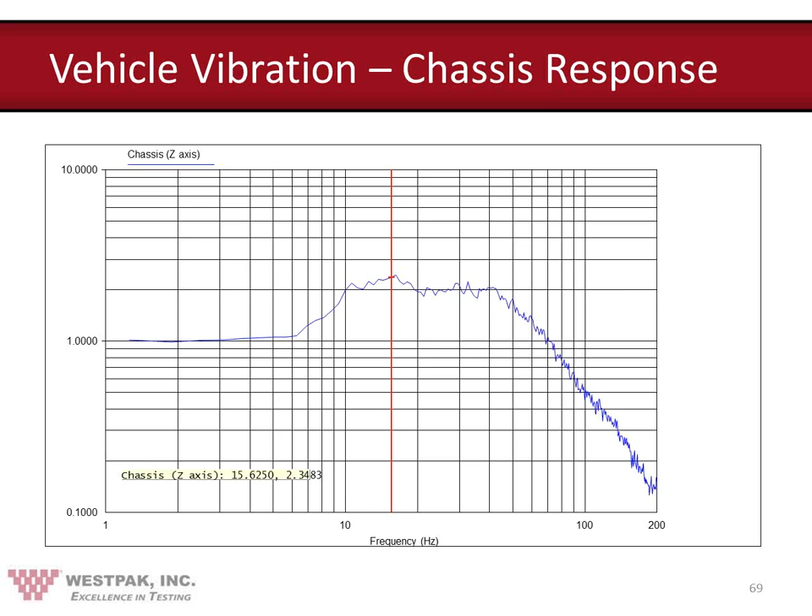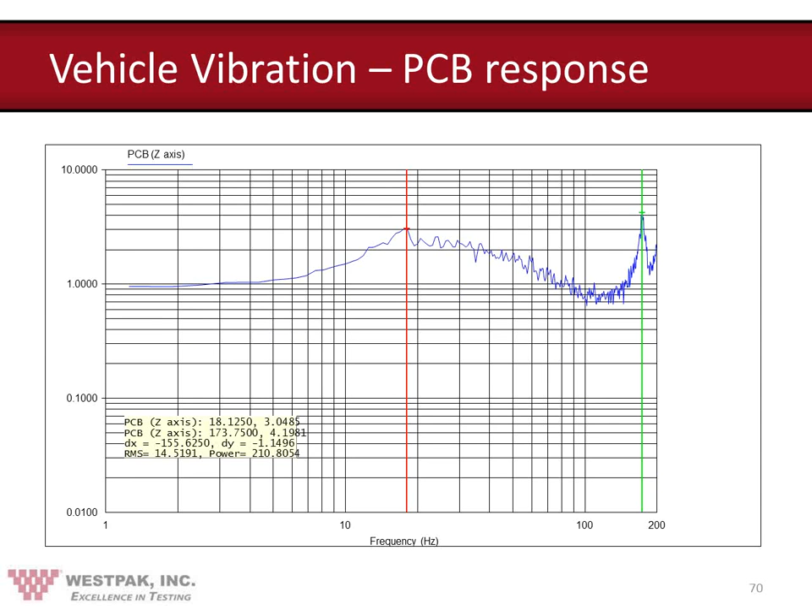As you may recall, it resonated there during our bare product sine and random vibration tests.

Some parting thoughts. Start by defining the environment and any regulatory requirements your product may need to meet. Establish the acceptance criteria for your product. Think about all the design and material choices first before you test. If you can, try to reference existing solutions. Always start with the smallest portions of your test plan first, and test as early as possible during your design and prototyping process. Take all the corrective actions possible before you finalize your tooling. And lastly, don't ever forget you have to ship it.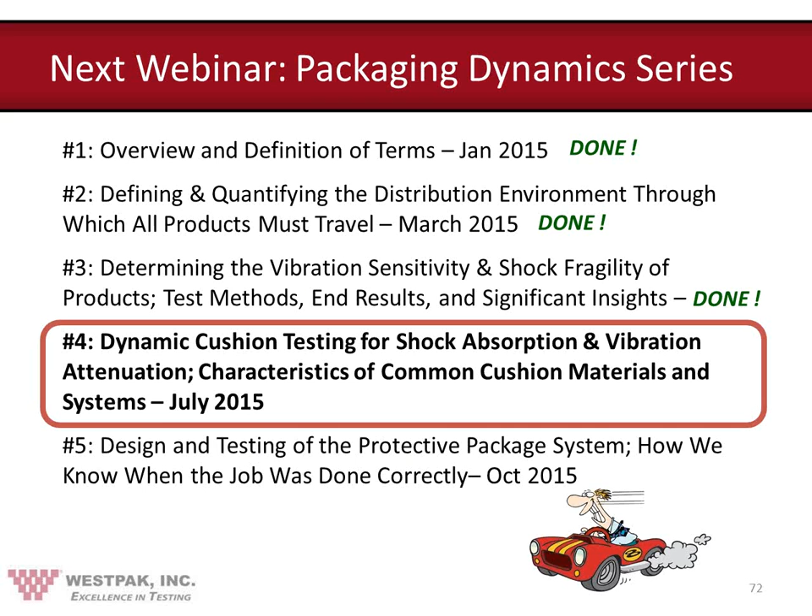We do have one more question. Is ISTA 1A still considered a valid test? Let me try to tackle that one. Good question. It all depends on what you mean by a valid test. It's been around for a long time. I think that basic sequence was developed in the 1930s.

It consists of a series of 10 freefall impacts and then an hour of vibration that can be either a repetitive bounce test or a random vibration test. So is it valid? The ISTA organization, International Safe Transit Association, calls it a general stimulation. They're not claiming that this procedure duplicates any particular environment, and I think that's a valid and correct call. It probably doesn't. But what it does do is provide some general excitation for the product.

It's kind of the difference between a stimulation and a simulation. So they're saying that it doesn't simulate anything. It does stimulate the product package system so that you can see what its responses are. So in that context, yeah, it's a valid test. It can certainly tell you something about the product.

Is it a valid simulation of the distribution environment? The answer is probably no. It's probably not, and they admit that. Interestingly enough, people who have done a lot of testing, or are very interested in this, let's take one particular example: the folks who ship a lot of package systems, the FedExes and UPSs of the world.